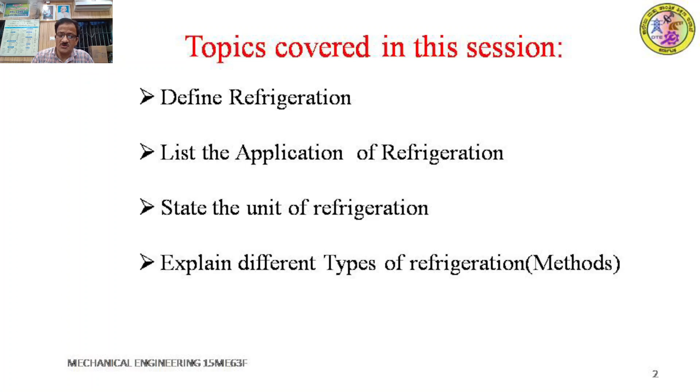So with that, we shall start our session 1. The main topics covered under this session are definition of refrigeration, list the applications of refrigeration, state the units of refrigeration, and explain different types of refrigeration, also called methods of refrigeration. So first of all, we shall try to define refrigeration. What is refrigeration?

Just imagine, as shown in the figure, there is a space which we shall consider as an insulated space. That space is to be kept at a lower temperature compared to its surroundings. Always the tendency of heat is to enter the lower temperature region from a higher temperature region. So in the refrigeration process, we remove the heat which enters into that space, and whatever heat is generated in that space must always be pumped out, so that we can keep that space at the required temperature level. For that we have to apply a refrigeration mechanism.

Here we have to define this term refrigeration. How can you define it? It may be defined as the withdrawal of heat from a given substance or space maintained at lower temperature than its surroundings. So you have to remove the heat from a substance or space where you require cooling. That is the definition.

And here I would like to add one more thing. Here we have used withdrawal of heat as one term, and maintained at lower temperature as another term. You may succeed in withdrawal of the heat, but that is not enough in refrigeration. We have to maintain the temperature always. For that, continuous removal of heat and maintaining of temperature is very essential. So the refrigeration definition must include withdrawal of heat as well as maintaining that condition always.

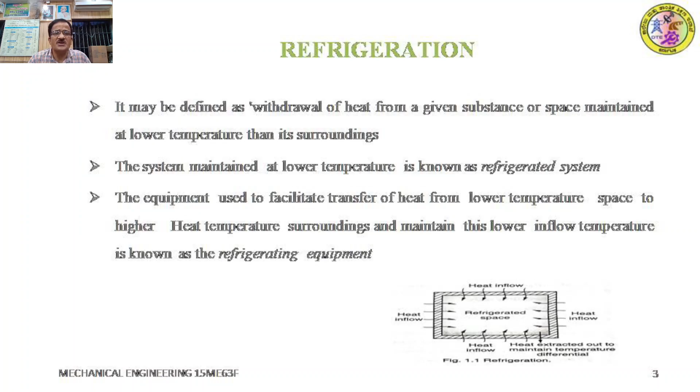The system maintained at lower temperature is known as a refrigerated system. Whichever system we keep at lower temperature can be called a refrigerated system. And the equipment used to facilitate transfer of heat from a lower temperature space to higher temperature surroundings and maintaining its lower temperature is known as refrigerating equipment. Whatever equipment, mechanism or machinery you use for this purpose is considered refrigerating equipment.

Okay, application of refrigeration. In the beginning I told you that applications of refrigeration are numerous, almost endless. But from our subject point of view, we shall list out a few of the major areas in which refrigeration plays a very important role. First, comfort air conditioning of auditoriums, cinema halls, hotels, banks and other commercial establishments, hospitals, residential areas, showrooms, dancing halls, offices, shopping malls, etc. So first, refrigeration may be used for comfort air conditioning, that is, to give comfort conditions for human beings.

Next, storage and transportation of foodstuffs. It is very widely applied nowadays. You have to transport food from the point of origin till the point of destination, from the producer to the consumer, in good intact condition, and there it plays a very important role. Next, manufacture and preservation of medicines.

Especially in the medical field, it has a very important role, because surgery etc. will be done in ICU rooms, and at the same time you have to preserve human tissues and organs in good condition for transportation. This is a very important aspect, as well as preserving vaccines. Nowadays we are all talking about the COVID vaccine, which must be preserved under lower temperature. So in all these areas it is very helpful.

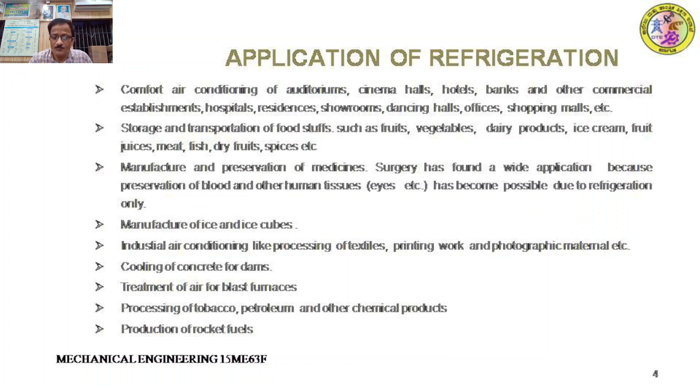Okay, units of refrigeration. Before taking up any process or activity, proper measurement is required. Without measurement, we cannot achieve or proclaim anything. Likewise, in the field of refrigeration some unit is required. That helps to set up the standard and carry out comparison, and finally we can conclude whether we have achieved it or not. For that, you have to define some unit for each parameter, and for refrigeration also we have to give some unit, which must be defined and understood first.

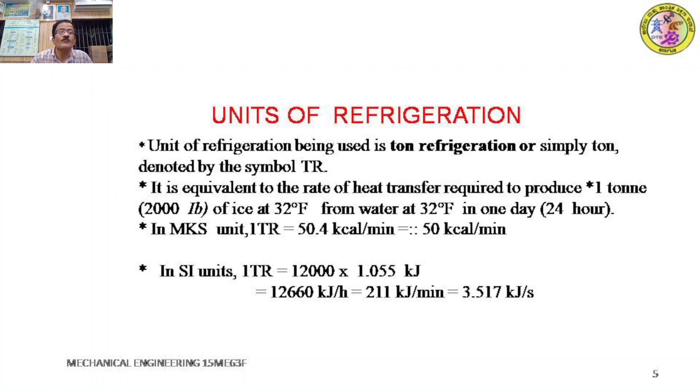Okay, next we shall take up methods of refrigeration. So there are numerous methods tried out for producing a refrigeration or cooling effect by scientists in several ways. A few of them you can list out, and we shall discuss them in detail one by one. Here I have listed 11 types of methods used for producing cooling effect.

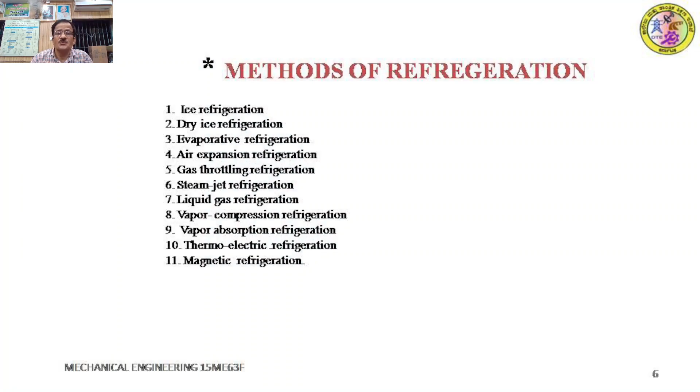First one is ice refrigeration, second dry ice refrigeration, third evaporative refrigeration, fourth air expansion refrigeration, fifth gas throttling refrigeration, sixth steam jet refrigeration, seventh liquid gas refrigeration, eighth vapor compression refrigeration, ninth vapor absorption refrigeration, 10th thermoelectric refrigeration, 11th magnetic refrigeration. So now we shall discuss in detail one by one these methods.

First, we shall take up ice refrigeration. So, as the name indicates, here we have to take either natural ice or artificial ice for producing cooling effect. So, arrangement is as shown in figure 1.2. So, there is a tray. Above the tray, you have to keep ice cubes or ice particles, and you have to make that space insulated. That is called refrigerated space. There you can keep your substances, or you can cool that space. If you do not keep the substances, then that space would be cooled.

So here actually what happens, when the ice kept on the tray comes in contact with surrounding air, you remember that the air is hotter than ice, then automatically there would be heat exchange between ice particles and air particles. So when air particles come in contact with ice particles, they become cooled by exchange of heat and they become dense. Their density increases and they start moving in the downward direction.

On the other hand, when they reach the bottom of the space, then they come in contact with other air particles or substances. Then there would be further heat exchange between the air particles and the surrounding air particles and other things. Then automatically air particles lose their density, they become light and they start moving in upward direction. In that way, there will be continuous exchange of heat from the space to the ice kept on the tray, and ice gradually melts and is converted into water, and it is let out as a drain.

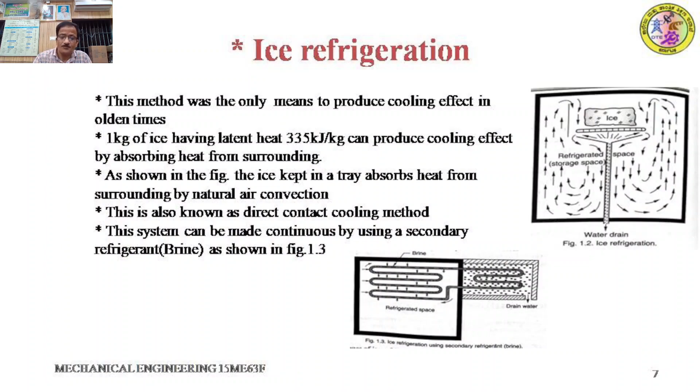Okay, we shall now take up the main advantages of ice refrigeration. The ice refrigeration has the following advantages. First one, it prevents dehydration of foodstuff like fresh fruit, vegetables, fish and poultry products, etc. So usually the ice is made up of water particles. So when it comes in contact with foodstuff, it will not suck the water content present in the foodstuff. So likewise, dehydration, meaning the removal of water particles from the foodstuff, can be avoided.

Otherwise, in the other cooling processes, usually when the surface is cooled, the moisture present inside the foodstuffs or fruit items will come out. That is what we call osmosis. In that way, it loses its quality and taste. But that does not happen here, because these ice particles or water vapor will avoid the escape of water from the foodstuff. Second, it preserves the appearance of eatable products and imparts them high appeal.

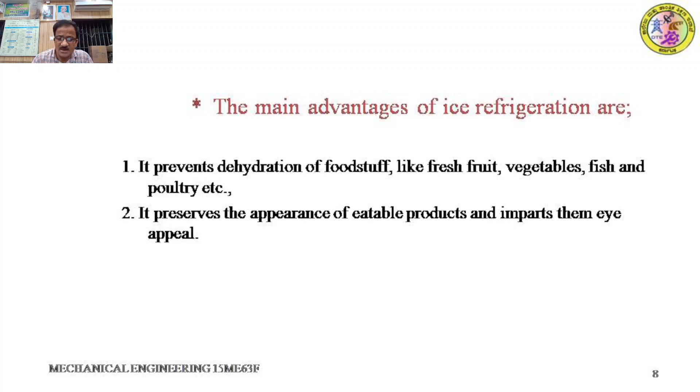So the appearance and taste can be retained as original. That is another advantage of this method. But it has many disadvantages also. So what are the disadvantages? There is a limit to obtain the lowest temperature. The lowest temperature theoretically possible by this method is 0 degrees centigrade, which is equal to the melting temperature of ice. If the temperature is to be further decreased, the help of some freezing mixture is to be taken.

The commonly used freezing mixtures are sodium chloride, calcium chloride, ammonium sulfate. Any of these salts is added to ice to enable it to melt at a faster rate, which causes more heat absorption. So the limitation of this method is that the lowest temperature that can be attained is 0 degrees centigrade. Below 0 you cannot proceed. Okay. Second, the ice is fed to the refrigerator off and on, which is not convenient and economical, as we already discussed.

Third, there is a problem of disposing of water coming out of the refrigerator. So after ice melting, water is formed, and that must be disposed of, which makes the surrounding area dirty and polluted. So it is a very highly objectionable thing.

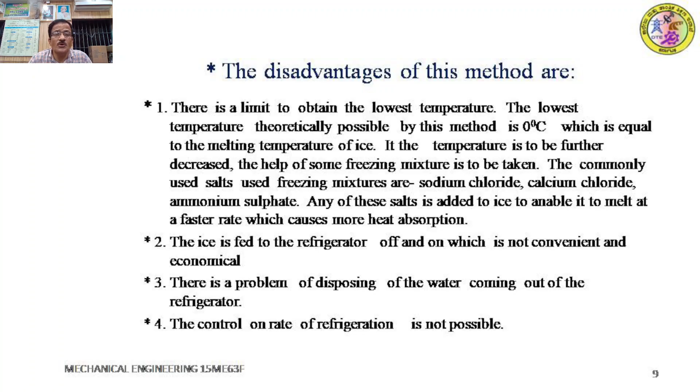Okay, then the control on rate of refrigeration is not possible. Here, the cooling has to take place as it is. We do not have any control over that process. That is another drawback of this method.

Okay, next we shall take up dry ice refrigeration. So in order to overcome some of the drawbacks of ice refrigeration, the next method tried out is dry ice refrigeration. So what is dry ice? Dry ice is nothing but solid carbon dioxide, commonly known as dry ice.

So this can be used conveniently, especially in transport vehicles, for keeping the foodstuff at a lower temperature from place of origin to place of destination. So refrigerated trucks, etc., will use this dry ice. Especially this method is very convenient for transportation through flights from one country to another country.

So what are all the reasons? We shall discuss them. Look here. So solid carbon dioxide is commonly known as dry ice. It evaporates at minus 78 degrees centigrade. That means solid carbon dioxide evaporates at minus 78 degrees centigrade under standard atmospheric pressure. So this method can produce lower temperature than the ice refrigeration method.

Then this method is widely used to preserve low temperature perishable foodstuffs like ice cream or frozen vegetables during transportation from one place to another place. So it is shown in the figure. The food cartons or boxes would be surrounded with solid carbon dioxide trays and kept in some insulated chamber. So in that fashion they are shifted from one place to another place.

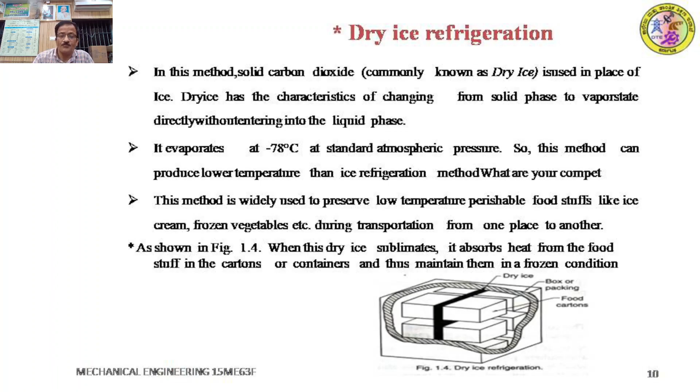Okay, next we shall take up evaporative refrigeration. It is another method of refrigeration. So in order to understand in a better manner, we shall take the following examples. When a liquid evaporates, it absorbs heat from its surroundings, equivalent to its latent heat of evaporation. Thereby, temperature of surroundings is decreased. So here, I would like to give one example.

In thermal engineering, you have studied steam formation. How does it happen? The liquid water is heated, and after some time it starts boiling, and after boiling water vapor will be produced; it is called steam. So here you might have noticed that in a boiler we have inserted a thermometer having a wide range above 100 degrees centigrade, and initially when you start supplying heat, you can observe changes in the thermometer reading. So it reaches up to 100 degrees centigrade, which is called the boiling point of water, under 1 atmosphere pressure.

So beyond that, whatever additional heat you supply would not make any change in your thermometer, and that additional heat is utilized to change the phase, that is from liquid to vapor. And till the boiling temperature of water, whatever heat you supply is called sensible heat, and beyond 100 degrees centigrade, that heat is called hidden heat or latent heat. So in order to convert any liquid into vapor, first of all you have to supply the latent heat of evaporation; then only it gets evaporated.

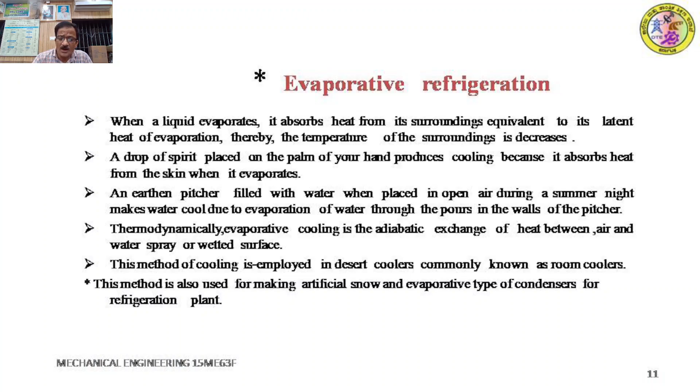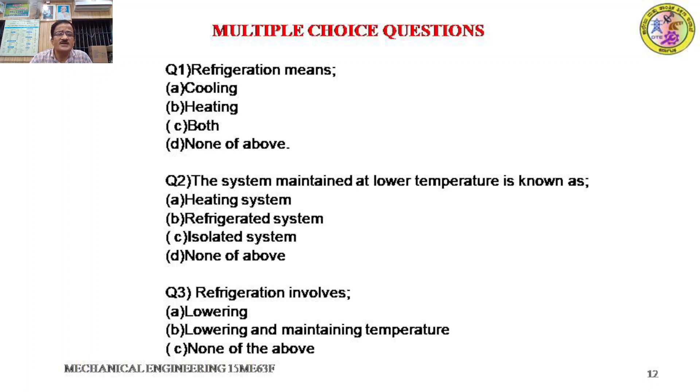Okay. Third question, refrigeration involves lowering temperature, or second, lowering and maintaining temperature, third, none of the above. What is your answer? As per the definition, it is option B, lowering and maintaining the temperature. Okay, we shall take a fourth question. The unit of refrigeration is TONNE, TONE, TON. So what is your answer? It is C, TON.

Fifth, in SI units, 1 ton of refrigeration means 200 BTU per minute, 50 kilocalorie per minute, 211 kilojoule per minute. What is your answer? Please recall. It is option C, 211 kilojoule per minute. Okay. Sixth question. The latent heat of ice is 336 kilojoule per kg, 335 kilojoule per kg, 224 kilojoule per kg. What is your answer? It is option B, 335 kilojoule per kg.

Seventh question. In ice refrigeration method, the transfer of heat from space to ice takes place by forced convective current, natural convective current, none of the above. So what is your answer? From our discussion, it's clear that it is natural convective current, since we are not using any pump or any other device for circulation of air. That's why it is natural.

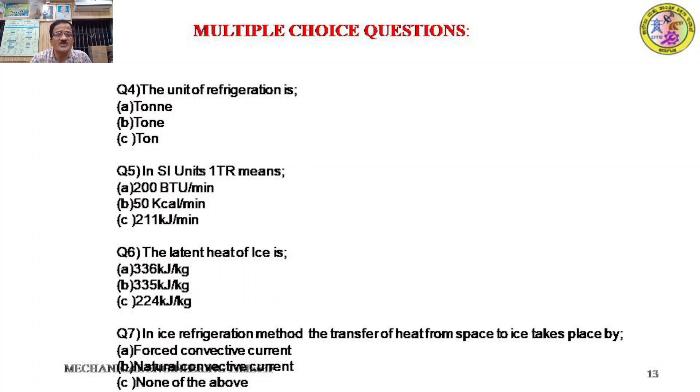So with this, we shall end this session. Before ending this session, I would like to tell you to please refer these reference books. They are standard textbooks meant for refrigeration and air conditioning, written by famous authors. They are available in your college libraries, and some are available in the e-library also. So please certainly refer these books in order to enhance and enrich your knowledge.